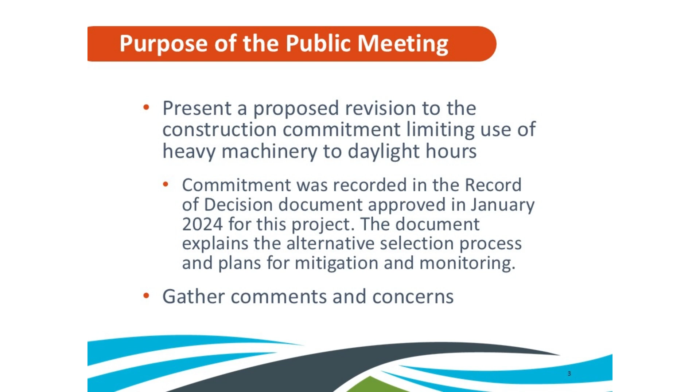Lastly, the purpose of today's meeting is to give you an opportunity to provide your feedback. At this meeting, you will also have the opportunity to speak with our project team members, who will be on hand to answer your questions.

This is an open house-style meeting, where you can walk through the project stations at your own pace. There is no formal presentation. If you would like to speak with someone, we do have project team members on hand to assist you.

In addition to this presentation, the following stations are available: a sign-in station, an exhibit station to review the layouts of the proposed change, a procurement station, a project update station, and a right-of-way update station for additional project information and updates, and a comment station for giving written or verbal comments.

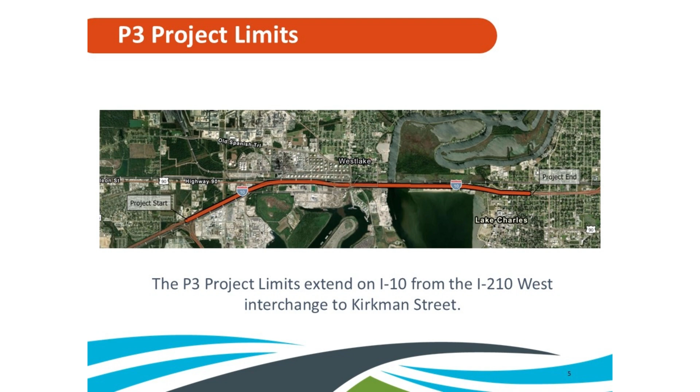This map shows the entire public-private partnership project area. The project limits extend on I-10 from the I-210 West interchange to Kirkman Street. Today's meeting is focused on design changes proposed east of the main I-10 bridge over the Calcasieu River.

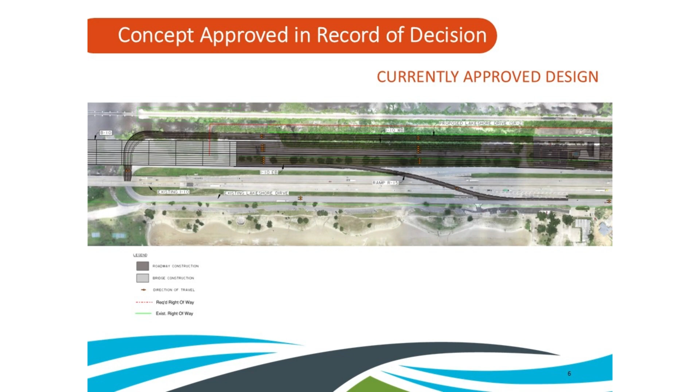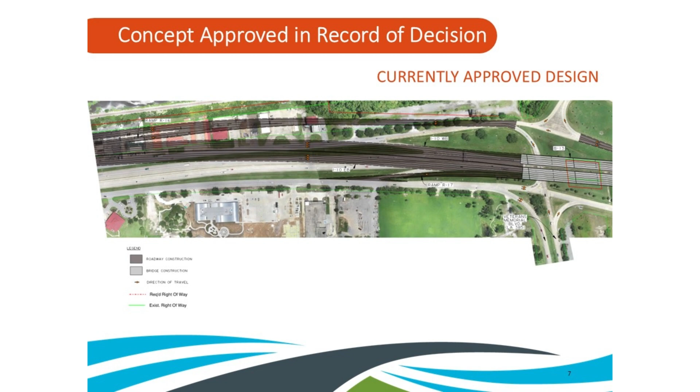This image is a continuation of the design east of the main bridge that was approved in the Record of Decision document. The Lakeshore Drive interchange configuration shown here is similar to existing conditions.

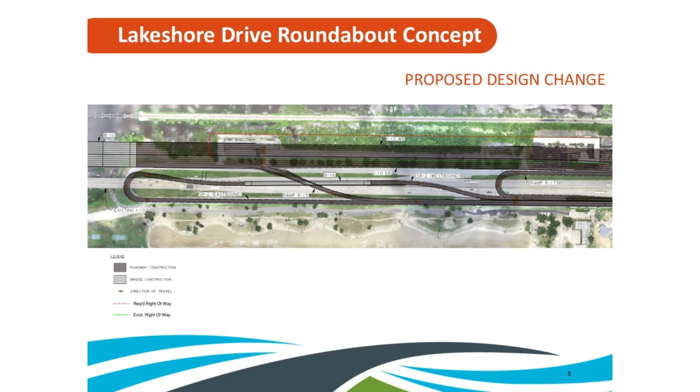This image shows the newly proposed roundabouts at Lakeshore Drive. The roundabouts are located at the intersections formed by Veterans Memorial Boulevard, Lakeshore Drive, Church Street, and the I-10 eastbound off-ramp. Additional exhibits and information regarding the proposed design changes are available at the exhibit station.

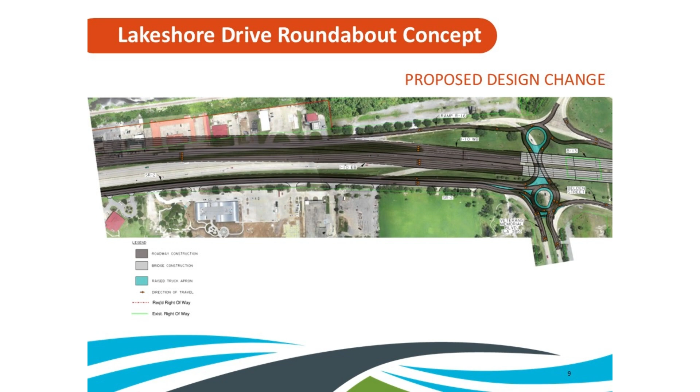Here is a zoomed-in view of the proposed roundabouts at the intersections formed by Veterans Memorial Boulevard, Lakeshore Drive, Church Street, and the I-10 eastbound off-ramp. Please visit the exhibit station for additional exhibits and information regarding the proposed design changes.

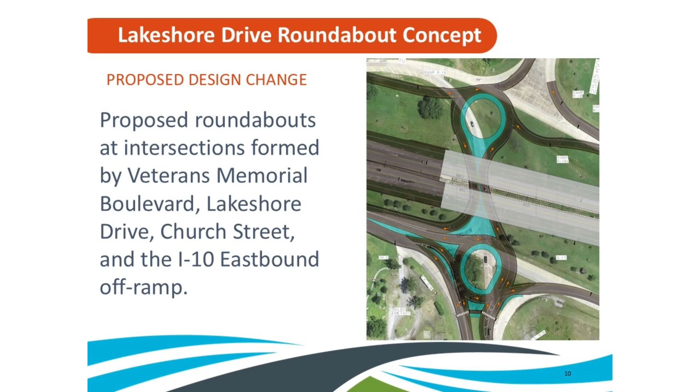The next 5 slides explain the construction sequence of the proposed roundabouts with information about how traffic will be maintained. Please note that I-10 will always remain open during construction activities.

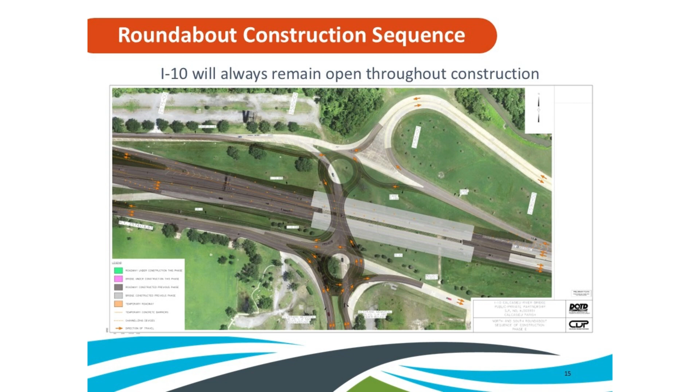Let's review the environmental conditions for the roundabout concept. The roundabouts will be located within the existing right-of-way, so there will be no acquisitions or relocations required. Additionally, there will be no impacts to historic or cultural resources.

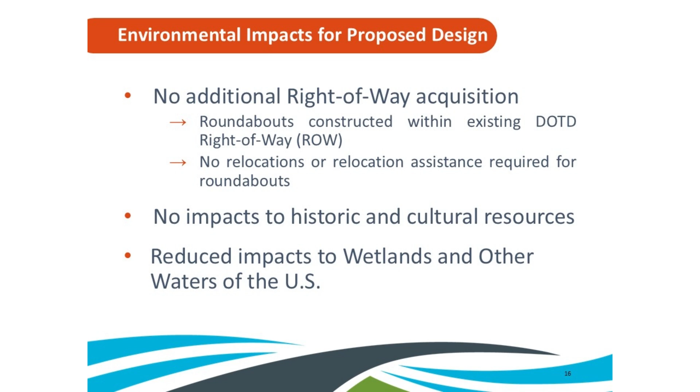Permanent impacts to wetlands and other waters of the U.S. north of Lakeshore Drive are decreased by 2.32 acres with this design. Impacts to the floodplain are not anticipated because of the proposed design changes.

Traffic noise impacts to noise-sensitive receptors within a 500-foot buffer of the proposed design modifications were re-evaluated. A noise receptor is defined as a discrete or representative location of a noise-sensitive area. Noise-sensitive areas include a wide range of locations, including but not limited to outdoor recreational areas such as parks and picnic areas, auditoriums, daycare centers, and residential areas.

Traffic noise impacts are predicted at 5 receptors south of I-10: the boat launch, the Lake Charles Beach picnic area, the Visitors Center, the Cypress Pond between Port Wonder and the Visitors Center, and Bilbo Cemetery.

Noise abatement for traffic noise impacts was considered and evaluated for both feasibility and reasonableness. LADOTD's noise policy establishes the criteria for determining whether noise abatement is feasible and reasonable. Noise barriers were found to be not reasonable because of cost effectiveness. No noise barriers are proposed for this portion of the project.

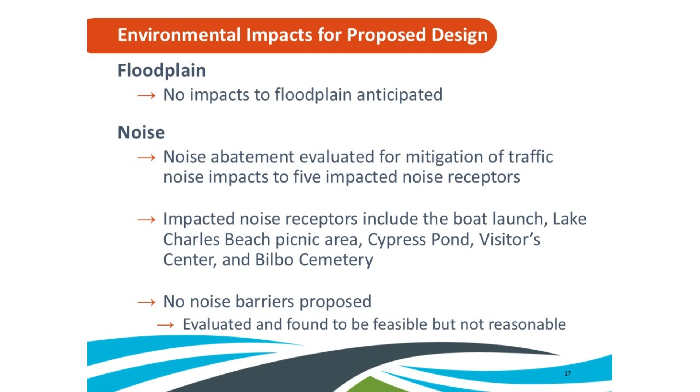The next three slides introduce a proposed change to a commitment made in the Record of Decision for the Calcasieu River Bridge project, restricting all use of heavy machinery and pile driving at night. Overnight construction is necessary because lane closures during peak traffic periods are not permitted for this project. Nighttime work will be performed responsibly with the least possible impact on residents and businesses.

Two locations with sensitive noise receptors have been identified where potential construction noise impacts could occur. One location is the neighborhood adjacent to Railroad Avenue. All project work will be conducted on the south side of the Union Pacific Railroad and more than 150 feet removed from Railroad Avenue. The second location is the neighborhood adjacent to Belden Street from Lakeshore Drive to Kirkman Street.

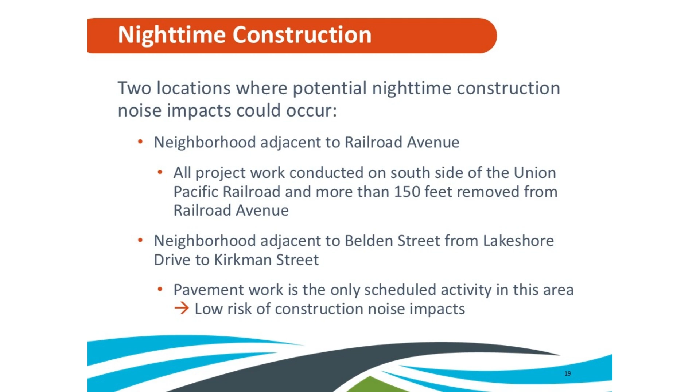Pavement work is currently the only scheduled activity in this location. Pavement work has a significantly lower potential for construction noise impacts compared to other activities. Modern diesel equipment will be used for construction. Diesel equipment operates at substantially reduced noise levels compared to conventional construction machinery.

Based on the types of equipment and methods of work that will be used during nighttime hours, and considering the existing ambient noise levels around the project, noise generated by nighttime construction operations will not exceed the current noise levels experienced by the surrounding area during normal daytime conditions.

If any noise-related concerns were to arise during nighttime operations, they can be immediately reported online at www.i10calcasieuBridge.com/contact. Your feedback is important to us.

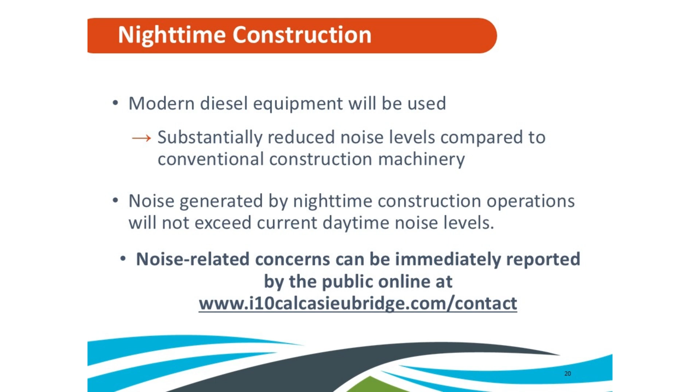The input we receive during this public comment period will help inform the decision on proceeding with the roundabout design.